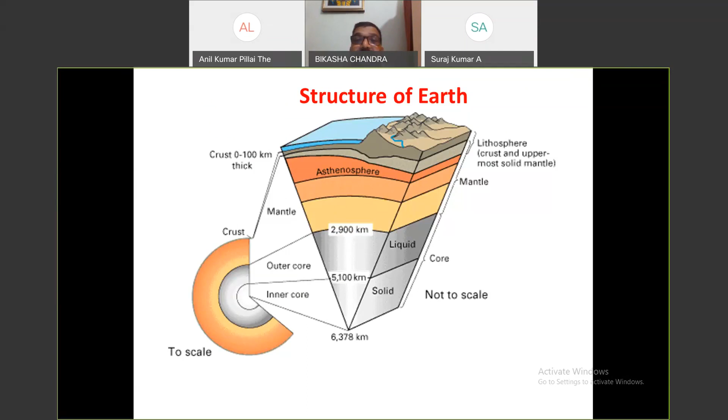We see how earthquakes really occur. We first need to learn about the constitution of the earth, which I already showed in my previous slide. Now we go into detail.

In the first 350 kilometers, we can also divide it into lithosphere, then asthenosphere, then mesosphere. From 0 to 100 kilometers it is called lithosphere, which, toward the bottom, is cool, rigid, and brittle in nature.

It is cool because it's the top surface of the earth, and it is rigid and brittle in nature. Then from 100 kilometers to 350 kilometers it is called asthenosphere, which is hot, weak, and plastic - not so solid, plastic but in hot condition.

Then below that we have the mesosphere. It is hot but stronger because it has more pressure, and due to the high pressure it is more strong.

And we can see here the oceanic crust. The continental crust is around 0 to 50 kilometers, and the oceanic crust is around 10 kilometers. Up to the lithosphere, it is 0 to 100 kilometers. So we can go to the next slide.

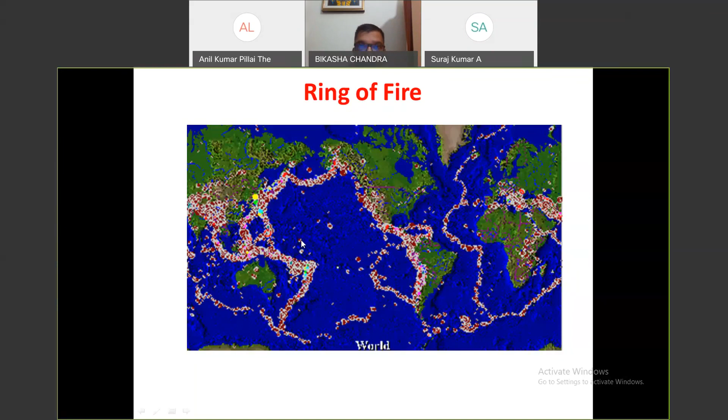From these, we got the idea that the top crust consists of plates, and these are the fault lines in between plates - the joints in between plates. From that, they got the plate boundaries. From the Ring of Fire, they derived the plate boundaries.

So we have different plates - all the boundaries are here. You can switch off your video if bandwidth is a problem. I'll do it from my end. If bandwidth is a problem, I think you can switch off your video, sir. Yeah, I did that from my end, sir.

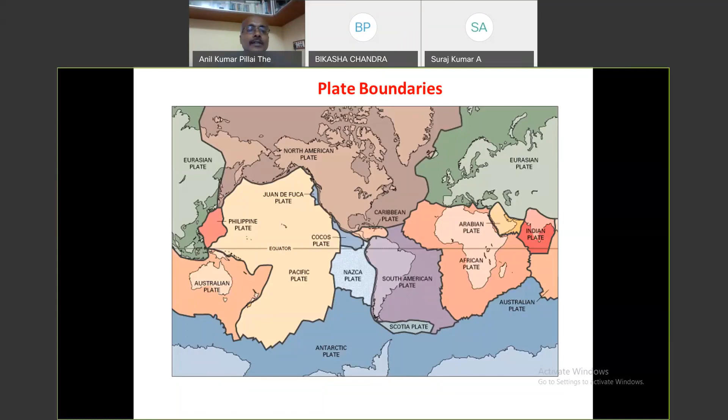Thank you. Okay, so now we can see the tectonic plates. Tectonic plates are large parts of the lithosphere, which we have already discussed. It is floating on the asthenosphere.

As discussed earlier, the asthenosphere is plastic and hot, and the lithosphere is solid and brittle. Because of the convection heat, and since it is plastic, it puts pressure on the lithosphere, which is rigid. The convective currents move with velocities of several centimeters per year.

The plates interact with one another in three basic ways: they collide with each other, they move away from each other, or they slide past one another.

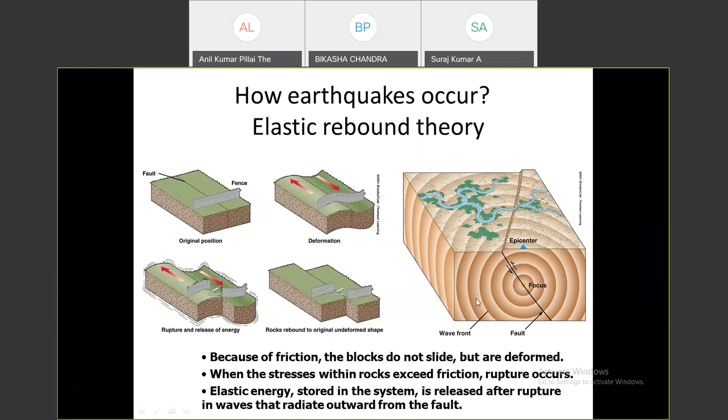Going to the next slide, we generally have body waves, elastic waves. The waves from the focus generate outwards, and these are called elastic waves. In elastic waves, we have body waves and surface waves. In body waves, we have two types.

Longitudinal waves are faster than transverse waves. The particles oscillate in the direction of spreading, like a sound wave, with compression and rarefaction. These are called primary waves.

The other type also starts from the focus towards the surface of the earth. These are called transversal waves. The particles oscillate in the direction perpendicular to the spreading direction, and these are called shear waves or secondary waves. They do not propagate through liquid.

As seen in the previous slide, the outer core of the earth is liquid, so S waves cannot pass through it. They resemble light waves, like sine waves, while P waves resemble sound waves.

Now in the diagram, this is the undisturbed material. When the P wave starts, we see compression, expansion, compression, expansion in the direction of movement. The secondary S waves move just like sine waves, up and down, in the direction of movement. So from the interior of the earth, or the focus, waves move towards the surface as body waves, with P waves moving like compression and rarefaction, similar to sound waves.

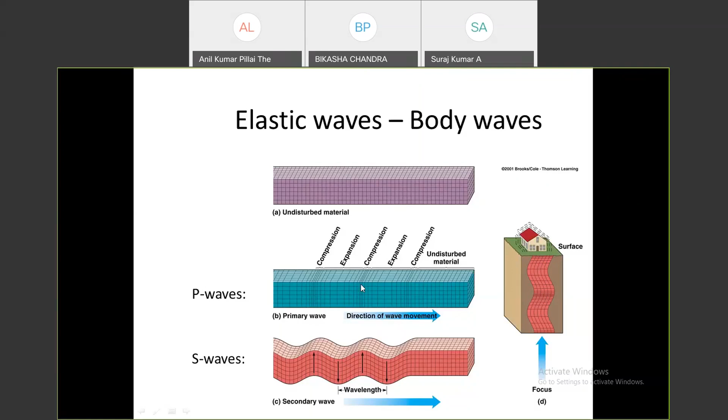Now, the surface wave. When body waves reach the surface of the earth, the primary and secondary waves convert to surface waves. Surface waves are harmful to our structures and buildings because buildings are situated on the surface and the ground.

We have two types of surface waves. One is the Rayleigh wave—you can see how it moves just like sine theta, up and down. And there is the Love wave.

The Love wave is also like a secondary wave, but it moves sideways—not up and down like a sine wave, but laterally like a snake. It moves horizontally, sliding side to side, while the Rayleigh wave also moves vertically. Both are sine waves, but the direction of movement is different.

You can see here the Rayleigh wave and the Love wave, and both are harmful to structures because they are surface waves, and their amplitude diminishes with depth. They have large amplitudes, are dispersive waves, with large periods, and are faster because they are surface waves.

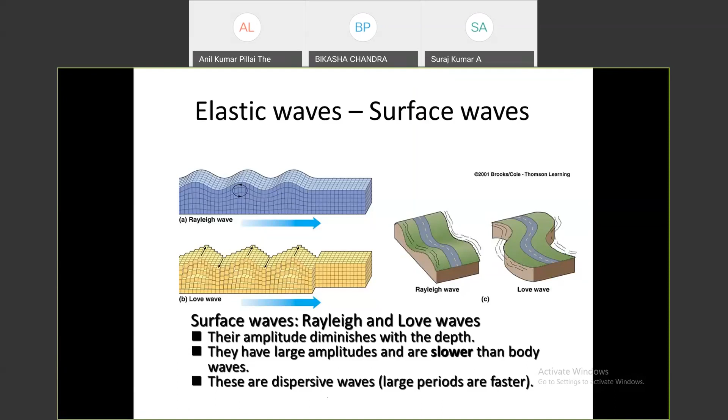So how does a seismogram actually work? We can see a simple diagram of a seismograph—a heavy pendulum, how the ground shakes, and how a sheet of paper moving on a drum plots the recording.

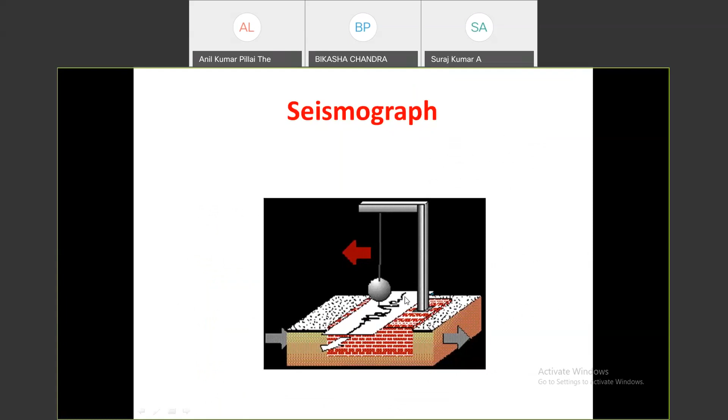In modern times, we have digital seismographs. The modern digital broadband seismographs are capable of recording almost the whole seismological spectrum, from 50 Hz to 300 seconds. Their resolution of 24 bits allows for precise recording of small quakes as well as unsaturated registration of the largest ones.

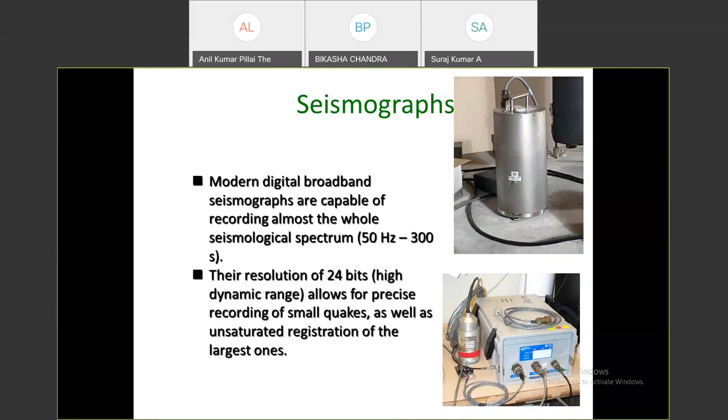Now we can discuss observational seismology, and how we can locate an earthquake. To locate the earthquake, we need precise readings of the time when the P and S waves arrive at a number of stations.

We can see here on the drum paper, the P wave has faster velocity, so it reaches first. Then the S wave reaches, so there is a time gap between the P wave and S wave—this is the first S wave, this is the first wave, this is the time gap. Since we know the velocity of the P wave and the velocity of the secondary wave, and this is the surface wave, from this time gap we can get the distance to the epicenter.

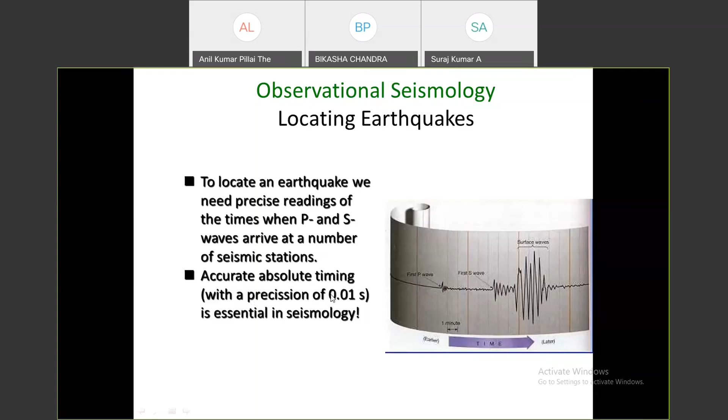Accurate absolute timing with a precision of 0.01 second is essential in seismology, so knowing the difference in arrival times of two waves is done using the travel time curves, which show how long it takes for P and S waves to reach some epicentral distance.

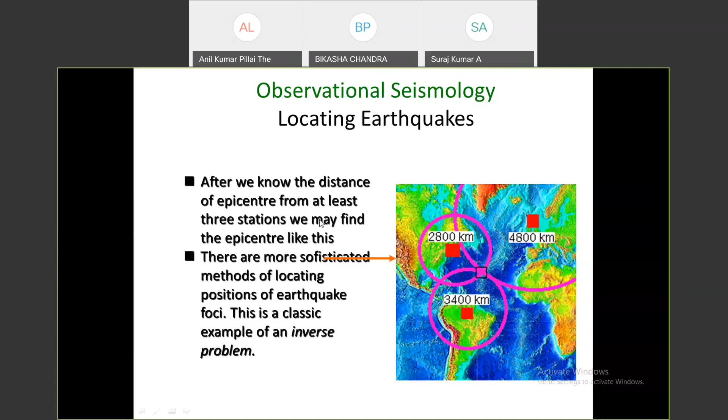We can locate the epicenter because a minimum of 3 observation centers are necessary. We know the distance to each observation center, and we can draw the radius of 3 circles. The meeting point of the circles is called the epicenter. So after we know the distance of the epicenter from at least 3 stations, we find the epicenter by drawing the circles.

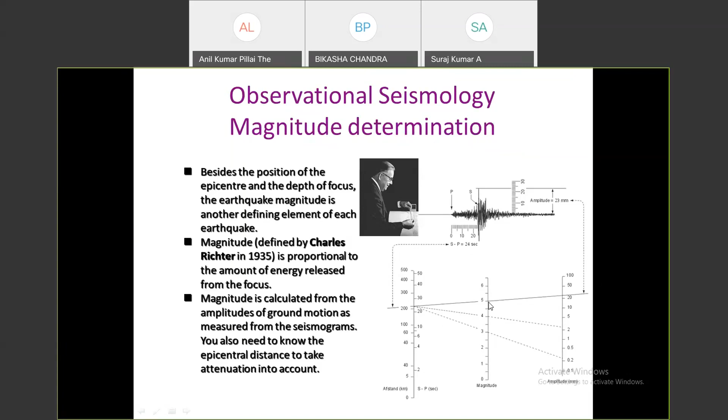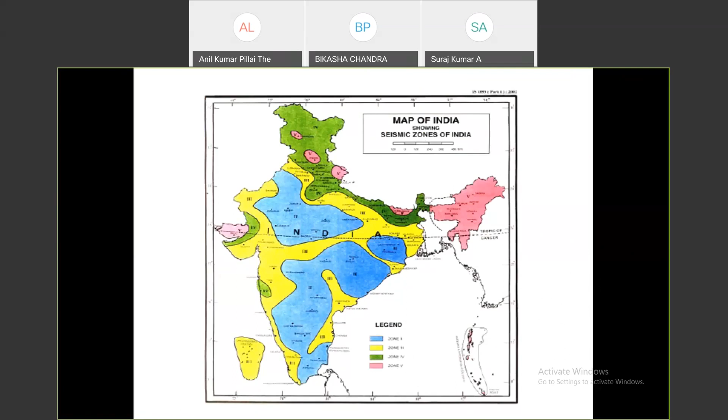Next, based upon the frequency and intensity of earthquakes, in India we have divided into 4 zones. In the previous code from 1993, it was 5 zones. Now zone 1 has merged, so now we have 4 zones divided according to importance.

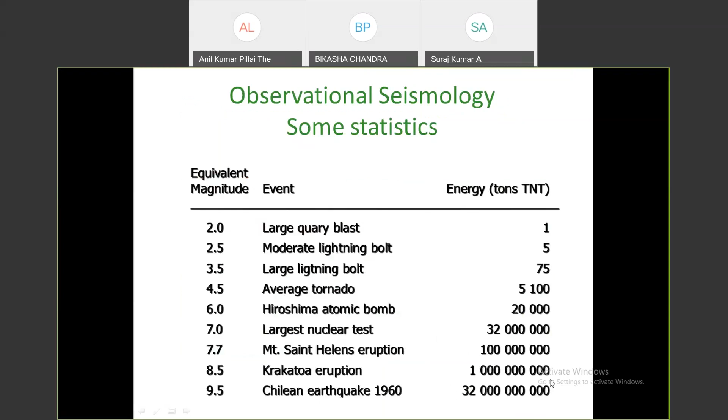Next, we can also express energy in TNT equivalent. For comparison: a quarry blast releases a certain amount of TNT, a large lightning bolt about 75 tons TNT, the Hiroshima atom bomb about 20,000 tons TNT equivalent, and the Chilean earthquake released this much TNT. So we can compare how much energy is released in an earthquake.

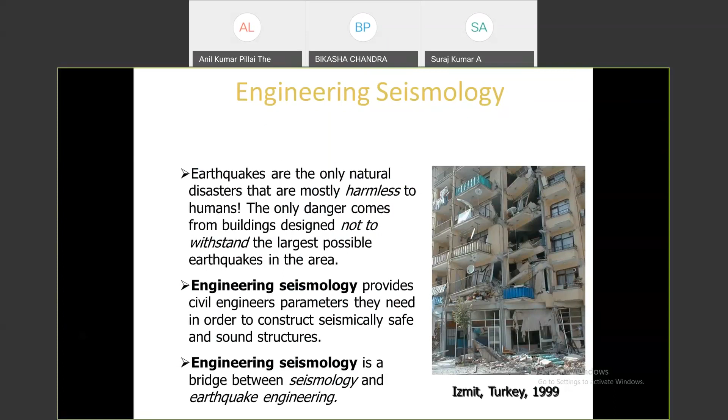Next, we can come to engineering seismology, where earthquakes are natural disasters that are mostly harmless to humans. The only danger comes from buildings designed not to withstand the largest possible earthquake. Engineering seismology provides civil engineers the parameters they need to construct seismically safe and sound structures. Engineering seismology is a bridge between seismology and earthquake engineering.

So a civil engineer requires these parameters: maximum expected horizontal ground acceleration PGA, maximum expected horizontal ground velocity PGV, maximum expected horizontal ground displacement PGD, response spectra, and maximum expected intensity. Engineering seismologists mostly use records of ground acceleration obtained by strong motion accelerographs.

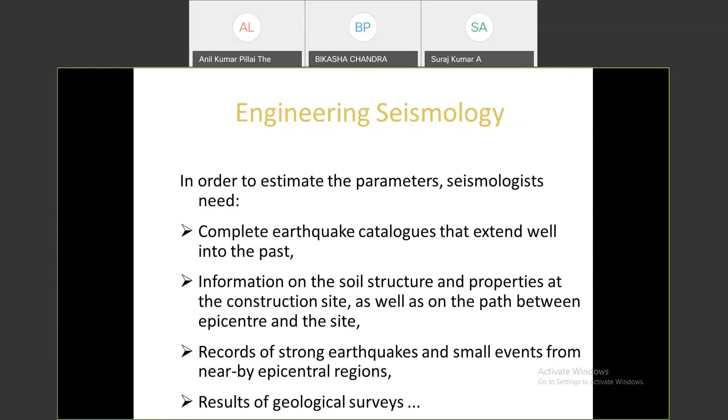In order to estimate parameters, seismologists need a complete earthquake catalog extending into the past, information on soil structure properties at the construction site as well as on the path between epicenter and site, records of strong earthquakes and small events near the epicenter, and results of geological surveys. So engineering seismology requires a complete and homogeneous earthquake catalog of the nearby area, epicentral distance, and soil conditions should be mapped. This is an example in Croatia.

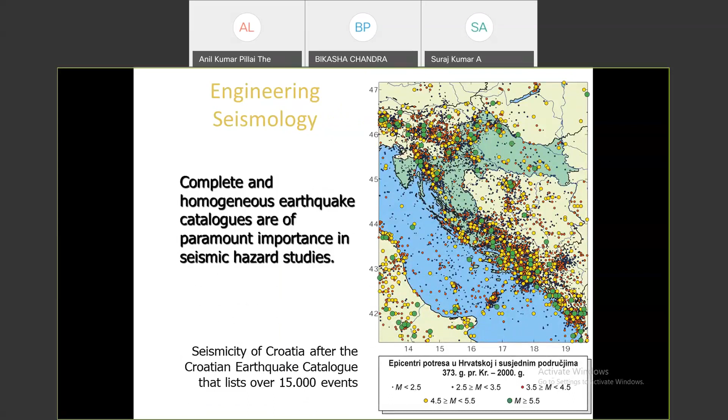We generally estimate in two approaches: one is probabilistic and the other is deterministic. In the probabilistic approach, we use statistical methods to find the probability of exceeding a predefined level of ground motion. In the deterministic approach, we use a predefined earthquake and calculate the effect and parameters of seismic force on the construction site.

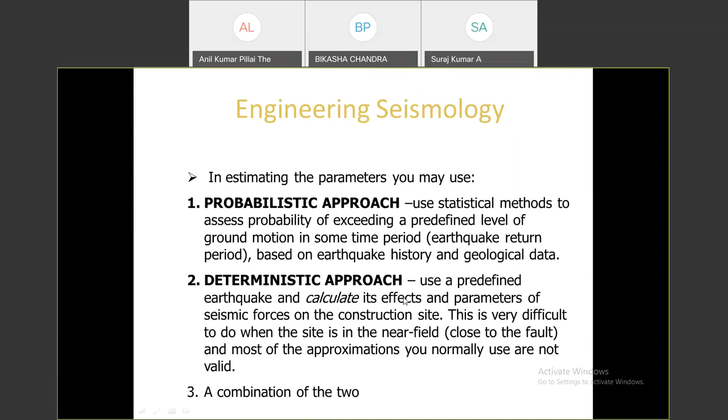Amplification depends upon the construction site and the soil condition below, such as in a coastal area versus a central area, which is always different. So the amplification of seismic waves may be the same, but it will amplify against the soil condition.

Amplification of seismic waves in shallow soil deposits may cause extensive damage even far from the epicenter. It depends on the thickness of soil above the bedrock, density and elastic properties of soil, frequency of shaking, and strength of earthquake. So even if the magnitude of an earthquake is the same at a place, the damage depends upon the soil condition above the bedrock.

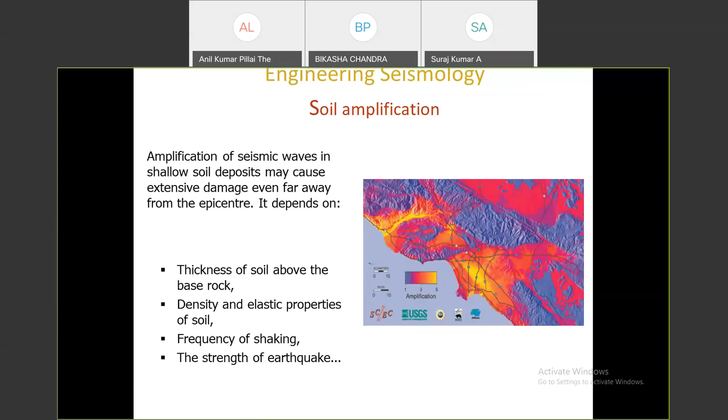So why should we build a sustainable structure? Because here the magnitude is 7.9, and for example, the death toll was this much in Japan. Though the frequency of earthquakes is very high, there were only very few deaths after 1923 in Japan, because all structures were built sustainably after that disaster.

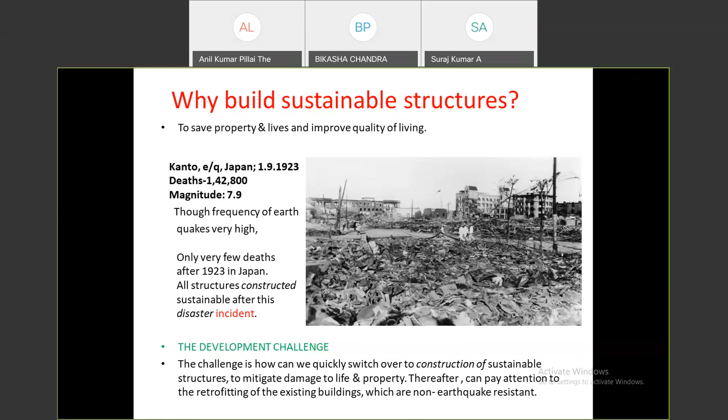So the challenge is how can we quickly switch over to construction of sustainable structures to mitigate damage to life and property. Thereafter, we should retrofit existing buildings which are non-earthquake resistant.

In India, we became more sensitized after the 2001 Bhuj earthquake. Before that, we were always giving attention to relief works. But after 2001 Bhuj, we gave more attention to mitigation, management, and damage control - all these things relating to earthquake resistant design and its importance.

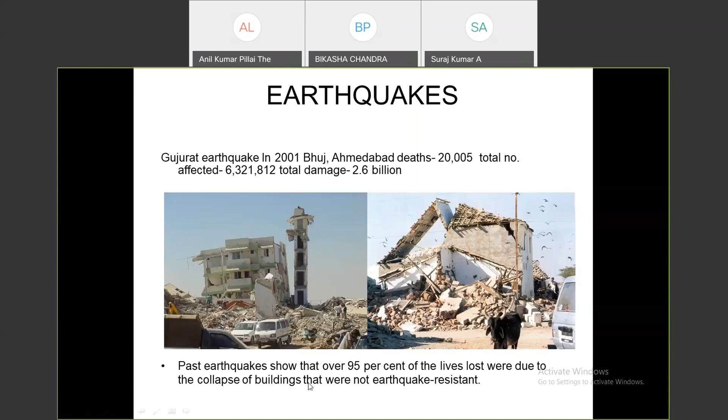Past earthquakes show that 95% of lives were lost due to collapse of buildings that were not earthquake resistant. Earthquake damage may be to human settlements, buildings, structures, and infrastructure - bridges, elevated roads, railways, water towers, pipelines, electrical generating facilities - and will continue if structural safety is not ensured.

Aftershocks of an earthquake can cause much stronger damage to already weakened structures. Earthquakes also trigger other hazards like landslide, fire, and flood.

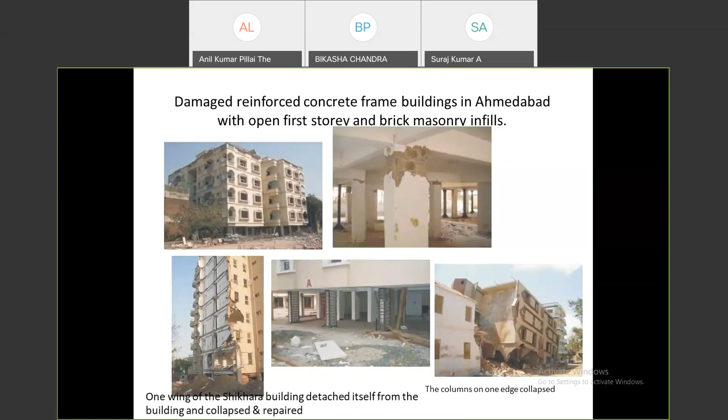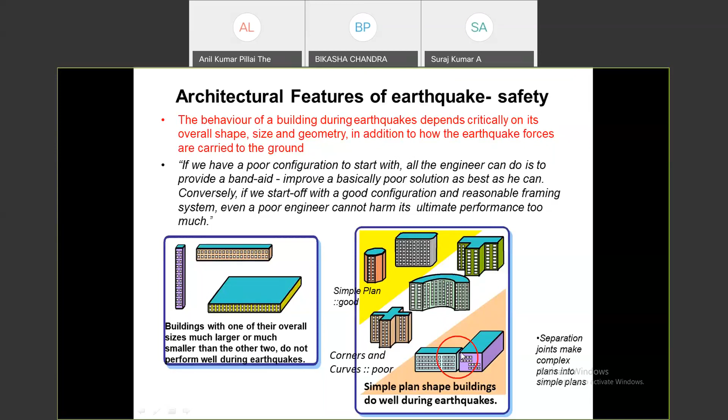These are simple plans, and we can use regular plans. In this last diagram, it was an L-shaped plan, and we just separated the joints to convert this complex L plan into two simple plans, because such a connection will attract torsion during vibration.

The sources of damage, as we've already seen, may be direct or indirect. The direct effect is one: ground failure, which may be vibration of soil, liquefaction, or ground lurching - first, damage due to surface faulting. This damage can completely demolish a house through rupture, tilting, and sometimes minor damage.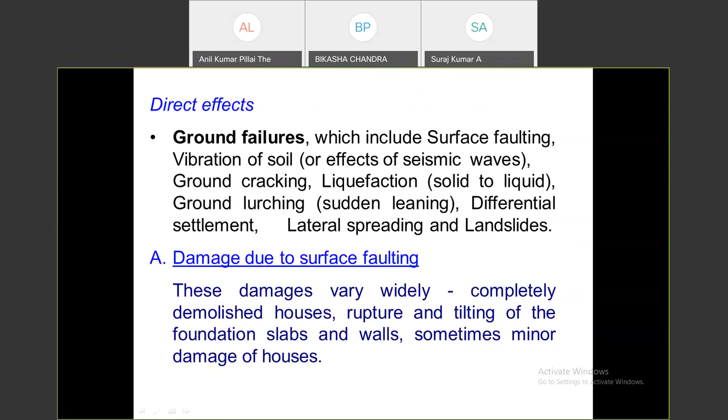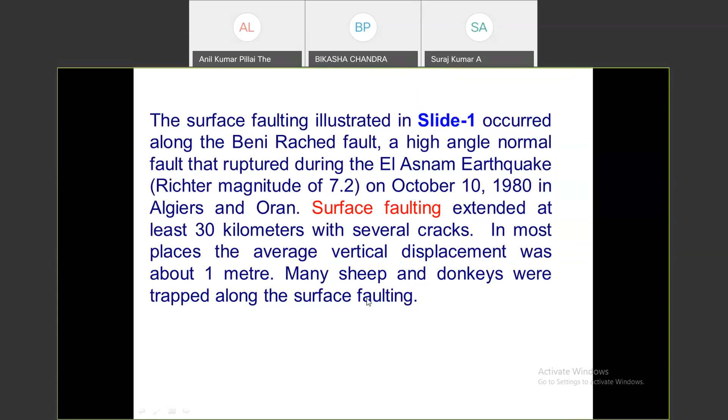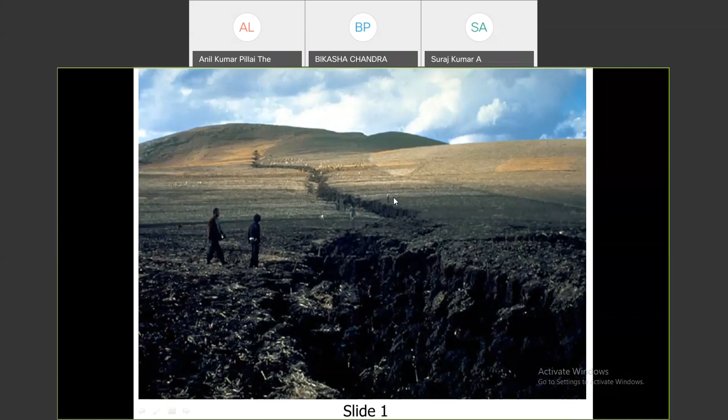We can see in this slide how a 7.2 magnitude earthquake on 10th October in Algiers caused surface faulting extending with more than 1 meter vertical displacement. Many sheep and donkeys were trapped along the surface faulting. This is actually after the earthquake - you see how the surface faults and the horizontal as well as vertical separation of the fault.

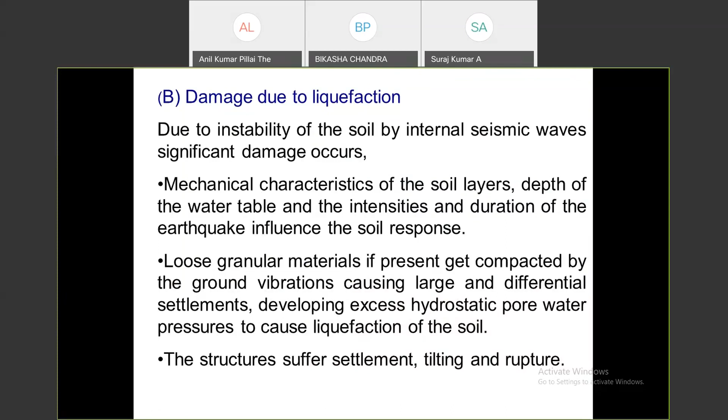Next, due to liquefaction - instability of soil can cause significant damage. Mechanical characteristics of soil layers, water table intensities, and duration of earthquake influence the soil response. Where granular materials are present, they get compacted by ground vibration, causing large and differential settlement, developing excess hydrostatic pore water pressure and leading to liquefaction of the soil. The structure suffers settlement, tilting, and rupture.

So we can see the effects of liquefaction in the next slide.

I think there is a problem, is it, sir?

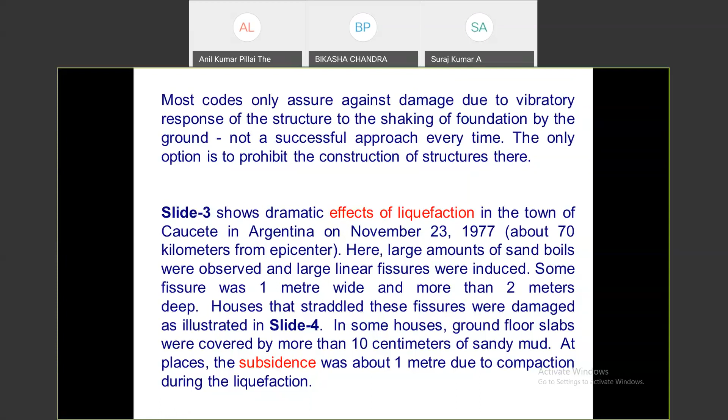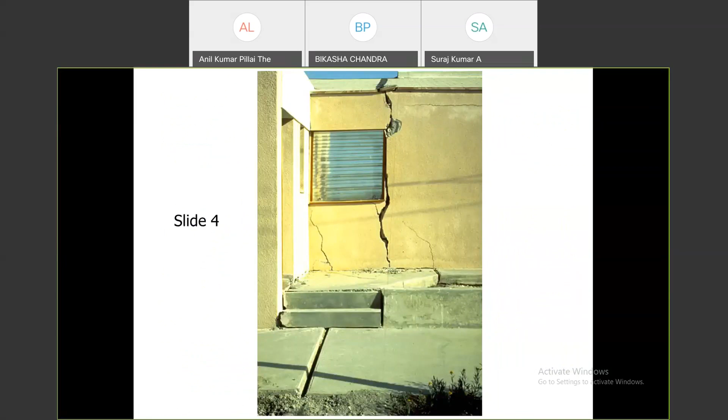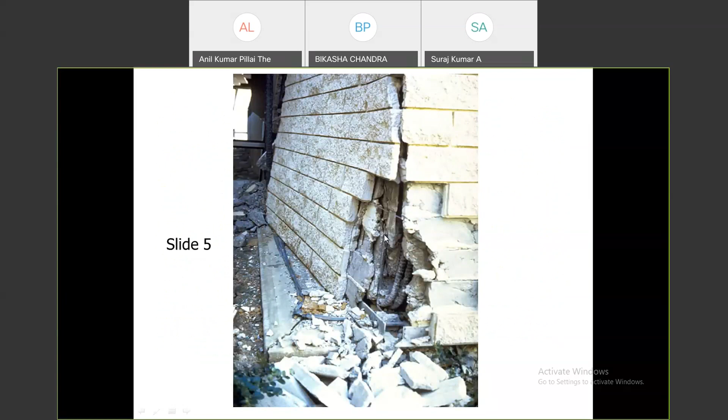Field inspection revealed that seismic performance of a structure is very sensitive to the type of foundation, structural material, design, and construction detailing. Slide 5 shows structural sliding, how, because of spreading of the soil and loose granular soil below, the wall and foundation are separated and spread apart.

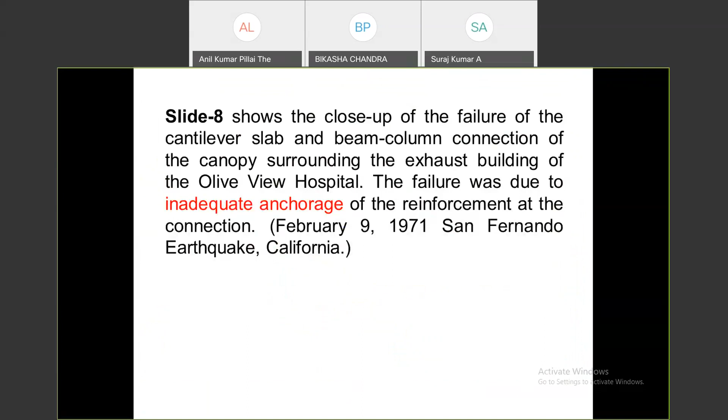So generally we will avoid cantilevers, we will avoid balconies, or they should be detailed according to code. We will discuss this in a few other slides.

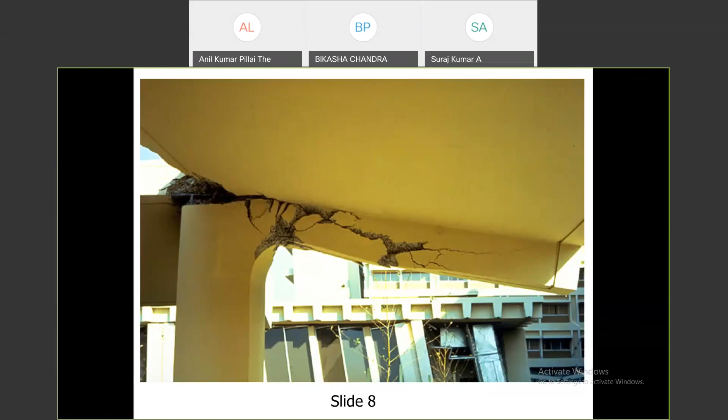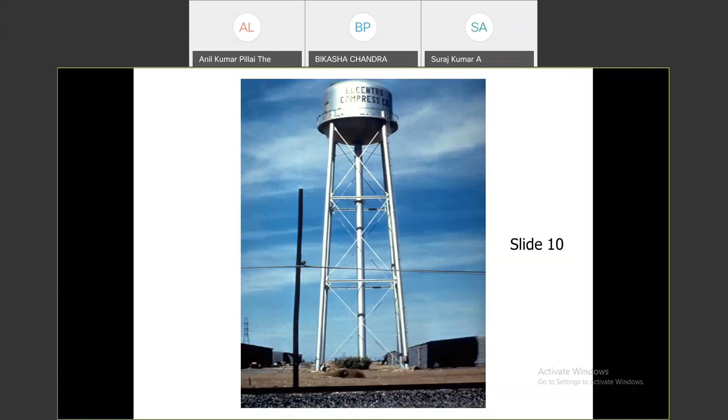Next, because of high slenderness ratio, you can see how the steel water tank column size looks slender, and with thin bracings, how it fell down. You can also have indirect effects like tsunami, landslide, floods, and fires.

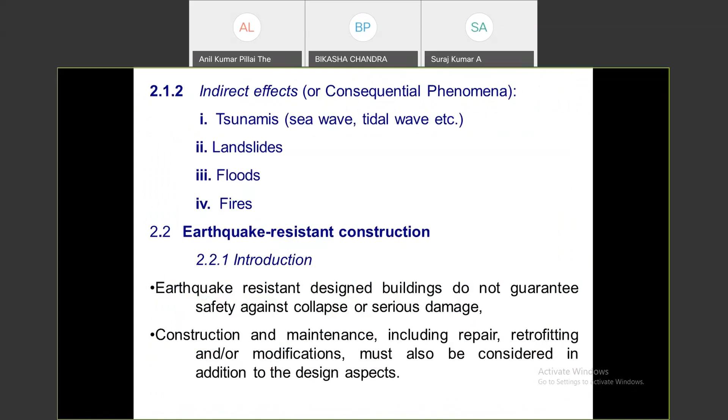Earthquake resistant construction and resistant design buildings do not guarantee safety against collapse or serious damage. Construction and maintenance, including repair, retrofitting, and modification, must also be considered in addition to design aspects.

Tied to different elements of the substructure, when the structure is built on a site with poor, loose, saturated, granular soil, moderate or strong shaking may cause horizontal displacement due to lateral spreading. In slide 12, we can see the damage was due to lateral ground spreading, loose saturated granular soil, and inadequate reinforcement of foundation tie beams.

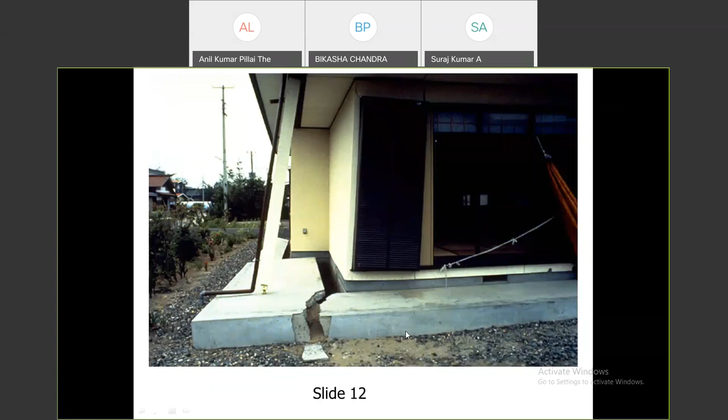Here you can see how it has been detached because of this granular soil. And this is a column - at the bottom of the column, since in a storied building the load flows from top to bottom.

So the bottom portion of the column takes the heavy load, and because of rocking up and down, if inadequate lateral ties are provided, not according to proper detailing, the reinforcement rods inside buckle because of the pushes, and it comes out by bursting.

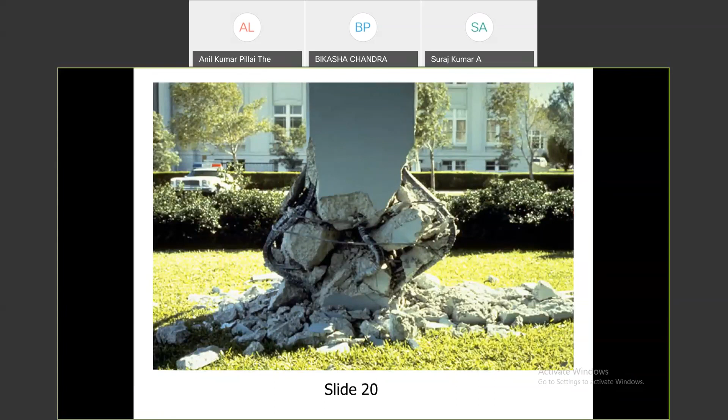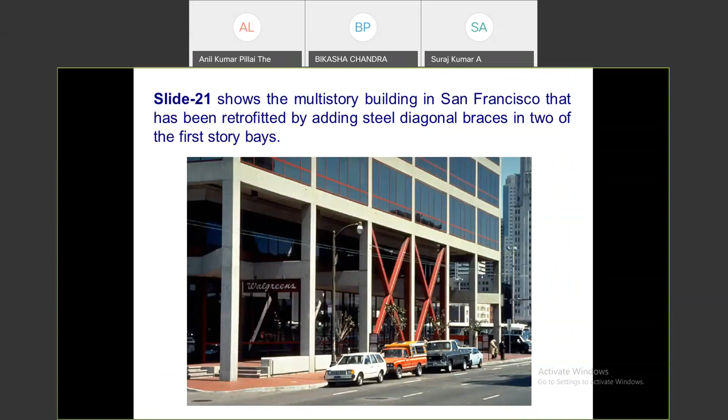So now we are coming slowly to the codes. We will discuss a list of standards of earthquake engineering - Indian codes that we have. We have the standard IS 1893 Part 1, which was revised in 2016 after the Bhuj earthquake from the previous version. This is the standard criteria for earthquake resistant design of structures, and it has 5 parts.

Part 1 presents the provisions that are general in nature and applicable to all structures. Part 2, revised in 2014, is related to liquid retaining tanks and water tanks. Part 3, revised in 2014, is dedicated to bridges and retaining walls. Part 4, revised in 2015, is for industrial structures specially. So part 1 is general, but parts 2 and 3 are specific.

Part 5 is for dams and embankments, and it has not been revised. Actually, it is not 2014, I just typed it that way - it is not revised yet, part 5, dams and embankments.

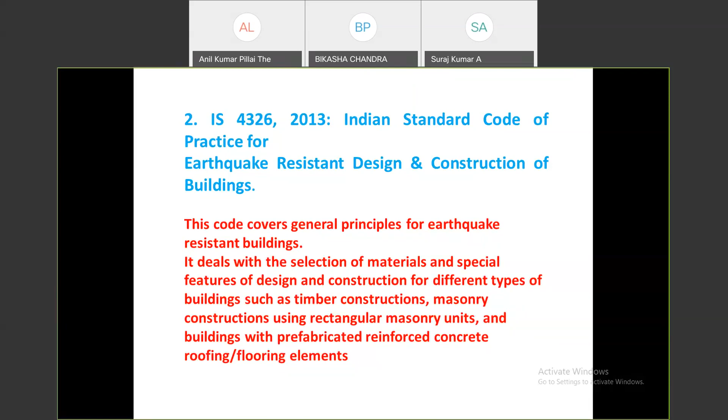Then there's another code, IS 4326. It is only one code, no parts - it is for earthquake resistant design and construction of general buildings. This code covers the general principles for earthquake resistant buildings. It deals with how to select materials, and special features of design and construction for different types of buildings such as timber construction, masonry construction using rectangular masonry units, and buildings with prefabricated reinforced concrete roofing/flooring elements.

The third is IS 13827 1993, for improving earthquake resistance of earthen buildings. India has more rural areas with earthen buildings still existing up to now, so how we can improve their earthquake resistance can be found in this code.

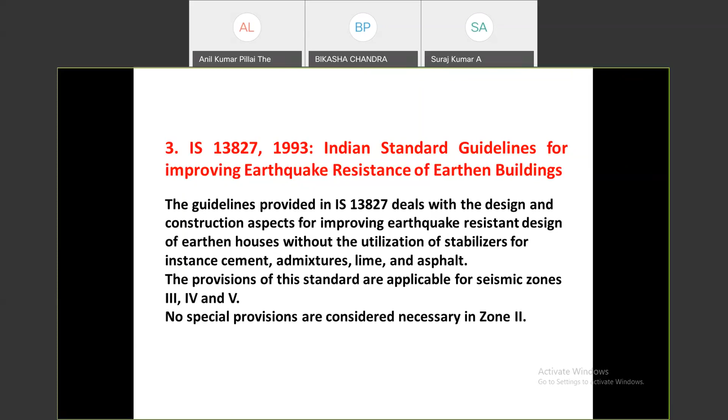The guidelines provided in this code deal with the design and construction aspects of improving earthquake resistance of earthen houses without the utilization of stabilizers, for instance cement, admixture, lime, and asphalt. The provisions of the standard are applicable for seismic zones 3, 4, and 5. No special provisions are considered for zone 2.

Similarly, the next code is 13828, which is generally applicable for improving the earthquake resistance of low strength masonry buildings. It provides the general principles of design and specifications for construction features for improving earthquake resistance of buildings of low strength masonry. The masonry includes burnt clay brick and stone masonry in weak mortars like clay-mud. The provisions of these standards are applicable in all seismic zones, though no special provisions are considered necessary for seismic zone 2. Low strength masonry dealt with in this standard is termed non-engineered and is not totally free from collapse under seismic shaking of modified Mercalli intensity 8.

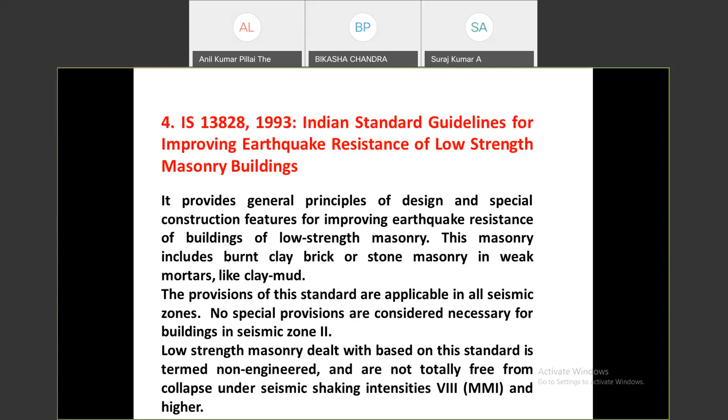Similarly, the next code is 13920. This is also a most important code, like IS 1893, for ductile detailing, revised in 2016. This standard provides the requirements for designing and detailing reinforced concrete structures in order to equip them with adequate toughness and ductility to withstand severe earthquake shocks without collapse. Previously, reinforcement detailing was as per IS 456, but after the Bhuj earthquake we became serious, and now we detail all buildings as per IS 13920 after 2001, and this detailing is different from 456.

The provisions for reinforced concrete construction given in this standard apply especially to monolithic reinforced concrete construction. Precast or pre-stressed concrete members may be used only if they can provide the same level of ductility as monolithic reinforced construction during or after an earthquake. The last important code is IS 13935:2009. This guideline generally covers the principles of seismic strengthening, selection of material, retrofitting techniques, and repair.

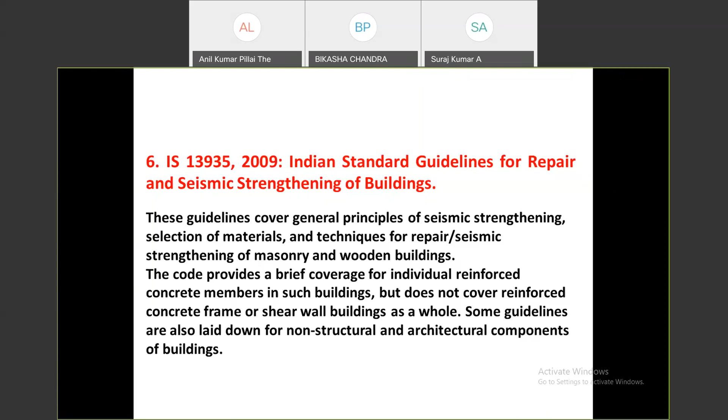So just briefly we'll go through this. These are the 5 zones. A town falling on the boundary of two zones shall be considered the higher zone. Now we have only 4 zones, since zone 1 and zone 2 merged in the latest code.

Sir, in this earlier map, can you explain about the zones, like which states, for example this yellow is what? Sir, the blue is actually zone 2 — zone 1 and zone 2 have merged in the latest code, so that is zone 2. Which is the most severe zone actually? Zone 5, sir, is severe. Zone 5 is only very less, no? Zone 5 has higher magnitude, you can see in the Himalayan Eastern area, and the boundary between the Indian plate and the Eurasian plate, that is the Himalayan area.

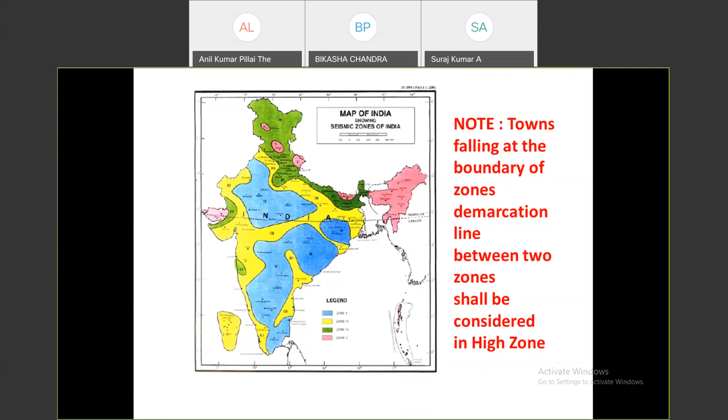Next, what is the basic approach of seismic design philosophy? One is to ensure that structures possess at least the minimum strength to withstand a minor earthquake without any damage. One should design the building such that, because one cannot design for earthquake proof — an earthquake may not occur in 100 years, or sometimes it may occur — so we have a philosophy: for minor earthquakes, the building can withstand without damage.

Two, it can resist moderate earthquakes without significant structural damage. So some non-structural damage may occur, like doors, windows, fans, something may fall, but without significant structural damage to beams and columns.

If there is damage, it can be repairable. In its second philosophy, it can be repairable because it is in a moderate earthquake. And the third is the most important.

Structure can withstand a major earthquake, like magnitude 8, 9, 9.5 higher, major earthquake design, but without collapse. So beam may damage, the column may damage, slab may damage, but it will give some time so the occupants can run away, without any collapse. Building may bend also, but no collapse. The occupants can escape. So this is actually the design philosophy, so that we can gain the strength as well as economics.

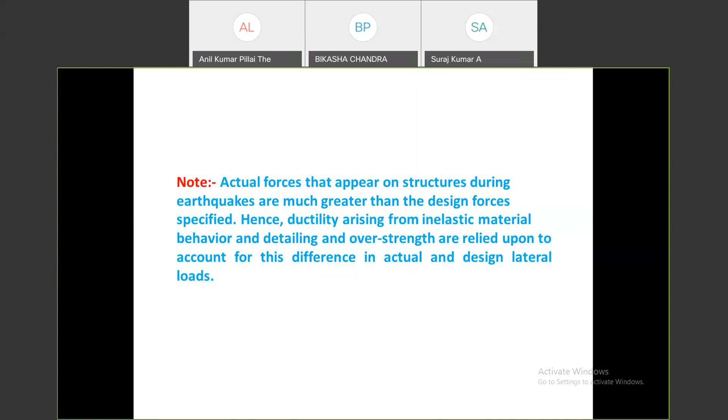So we are actually depending on that ductility. So the important thing is ductility coming over that. So what is the design spectrum? It is in 6.4 of the same code section.

For that we should have the earthquake load. Actually the ground is shaking horizontally. So what is the total horizontal earthquake force on a building? If we know the weight of the building, we can multiply it with a horizontal seismic coefficient, given in the code, and that coefficient is AH, which depends upon Z, that is the zone. The place is in which zone, as we have seen in the previous map, zone 2, 3, 4, or 5, and also I, that is called the importance factor.

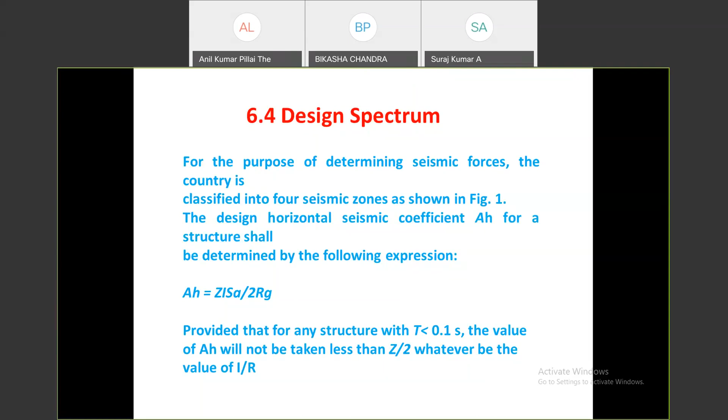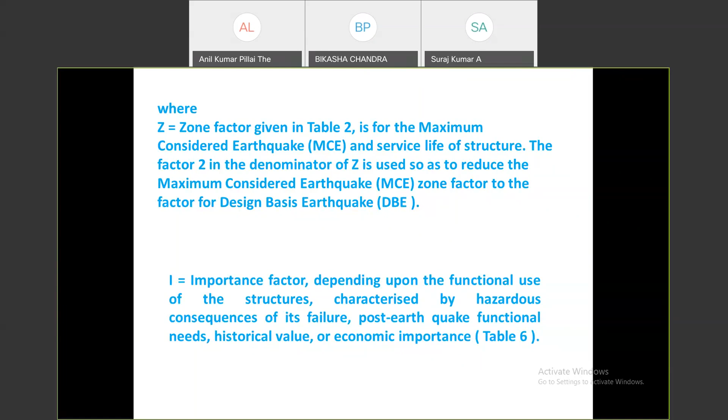Where Z is the zone factor given in table 2, for the maximum considered earthquake and service life of structure. And I is the importance factor, depending upon the functional use of the structure, like telephone building, hospital, police station, industry, firefighting, which should be ready during the earthquake. We should give more importance to a school or institute than a residential building. So this is called the importance factor, given in table 6 that we will show.

Then there's the response and reduction factor. Depending on the structure, the seismic damage performance of a structure, like a masonry building, will be more prone to damage compared to an RCC building, and compared to a special detailing building. So response reduction factor, what is the response we can reduce also, a scope is given in the code, that is given in table 7.

And SA by G, this is the average response acceleration coefficient for rock or soil sites. As in the previous slide, we have seen the magnitude of earthquake may be same, but the ground acceleration will be amplified because of the bedrock or soil properties. So SA by G, the average response acceleration coefficient for rock or soil sites, as given in figure 2, is based on appropriate natural periods and damping of the structures. These curves represent the free field ground motion.

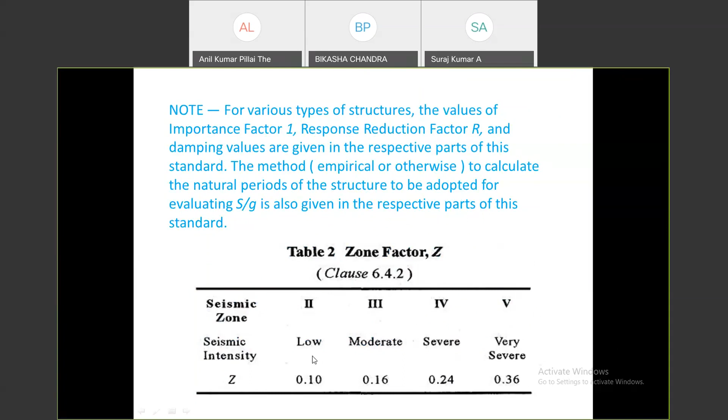So now you see table 2, zone. We have 4 zones. Zone 1 and 2 are already merged in the recent code. So seismic intensity in these zones, the zone factor we can take from that code to calculate the coefficient AH. Here we can take the zone factor depending upon which zone the structure is in. Zone 2, 3, 4, very severe 0.36, low 0.1, like that, given in the code table 2. And this is actually for rock, medium, and soft soil.

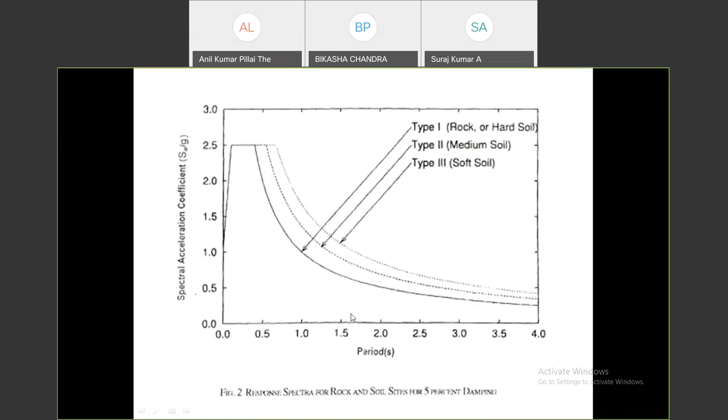This is the time period table, and this is SA by G, as we have discussed earlier in the previous slide. So according to the soil, different rock, medium soil, very soft soil like coastal area, these are the coefficients, and this is the time period of the structure.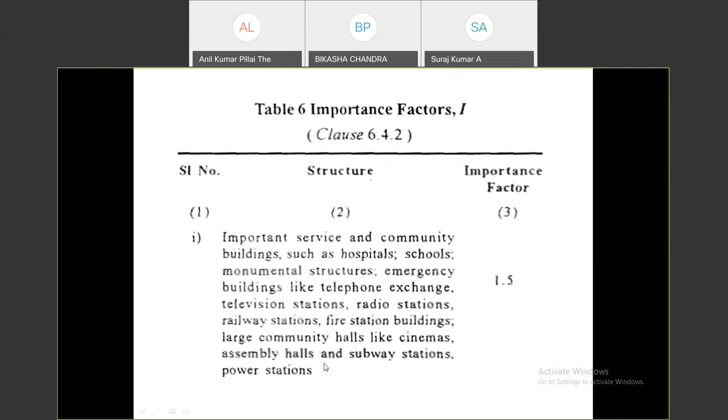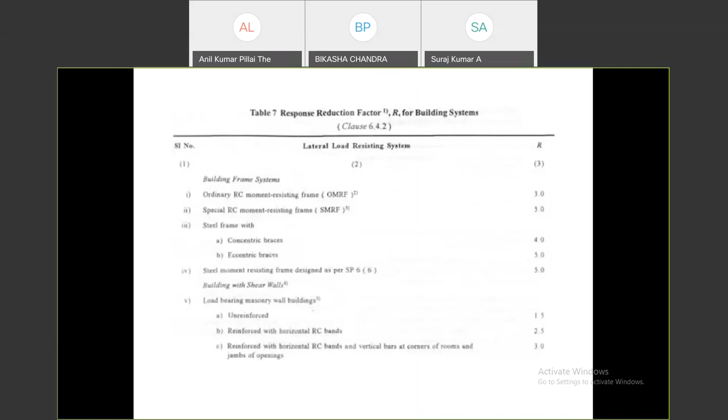This is response reduction factor R. Number 1 is ordinary RC moment resisting frame, OMRF, and special RC moment resisting frame. The value is different for ordinary RC moment resisting and for special moment resisting, because ordinary RC moment resisting frames means already designed by IS 456 for existing buildings, but special RC moment resisting frame means where 13920 ductile detailing has been taken into account with the earthquake code, so it has more resistance. The reduction factor will be as given in the code for different structures.

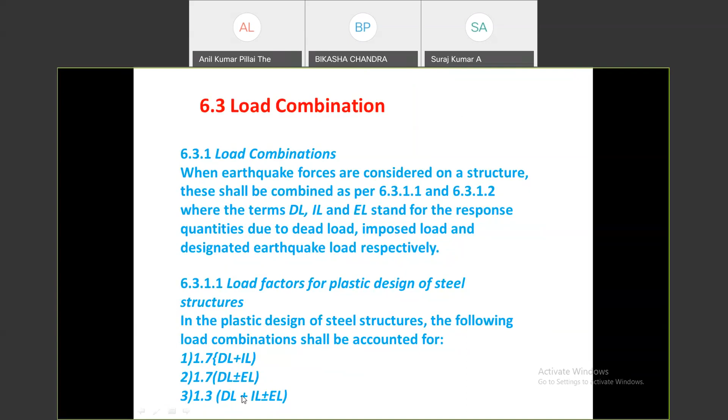Now directly I'm going to load combinations. We have dead load, imposed load, and earthquake load. For plastic design of a structure, we can take 1.7 dead load plus imposed load, 1.7 dead load plus earthquake load, and 1.3 dead load plus imposed load plus earthquake load for plastic design. For RCC, it is given as 1.5 dead load plus imposed load, 1.2 dead load plus imposed load plus earthquake load, and 1.5 dead load plus earthquake load. These are the combinations we can take, as the structure is subjected to, given in the code.

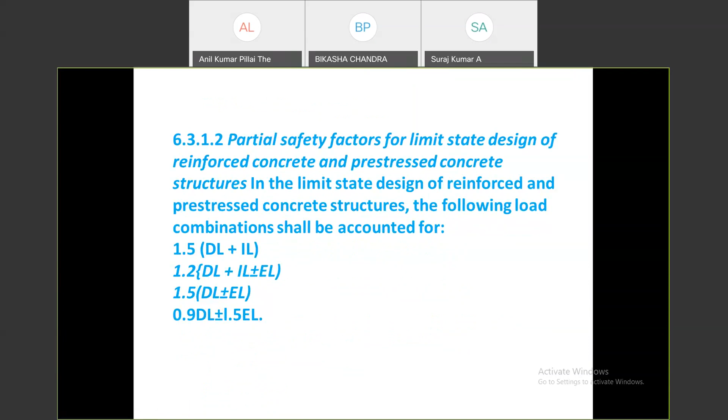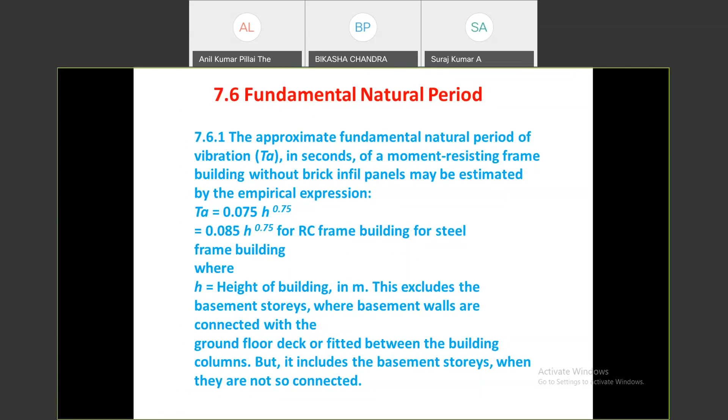Fundamental natural period: to calculate that, as shown previously, we can calculate the natural period of a structure given in the code as 0.075 h to the power 0.75, or 0.085 h to the power 0.75, for RC building or steel frame building, where h is the height of building. We can also approximately calculate the natural period of other buildings by the formula 0.09 divided by root over D, where D is the base dimension of the building at plinth level.

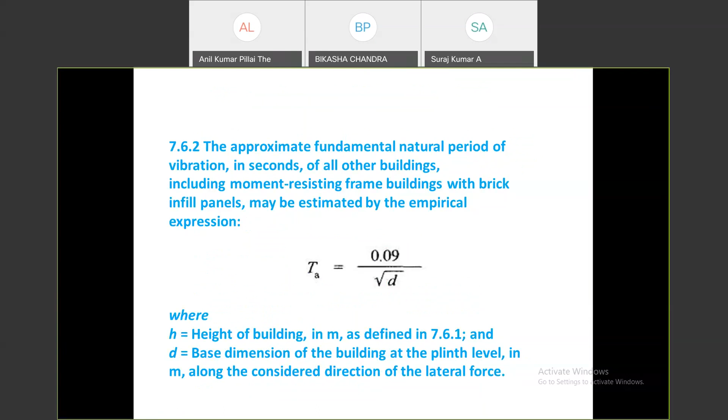The previous discussion was about static analysis, based on coefficient, that is an empirical method, but not dynamic analysis. Dynamic analysis is actually a real analysis, not an empirical formula. So we can do it.

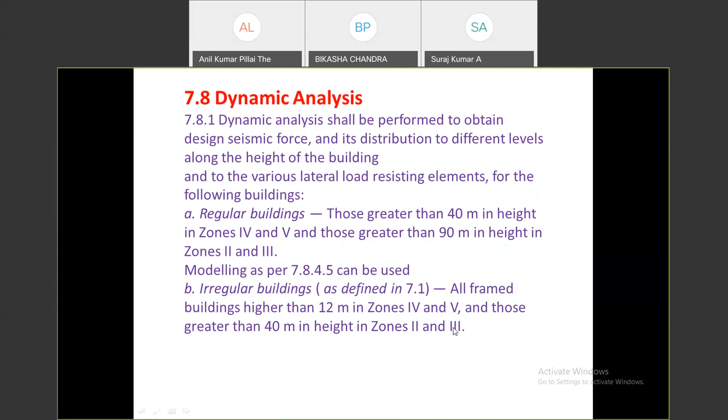Nowadays we are doing dynamic analysis, but for regular buildings, it applies for heights greater than 40 meters for zone IV and V, and greater than 90 meters for zone II and III, having less magnitude of earthquake. But for an irregular building, which will attract torsion in addition to bending and shear, irregular buildings are already defined in 7.1. All framed buildings higher than 12 meters instead of 40 meters in zone IV and V, and those greater than 40 meters, not 90 meters, in zone II and III, that is for irregular buildings, we have to perform dynamic analysis.

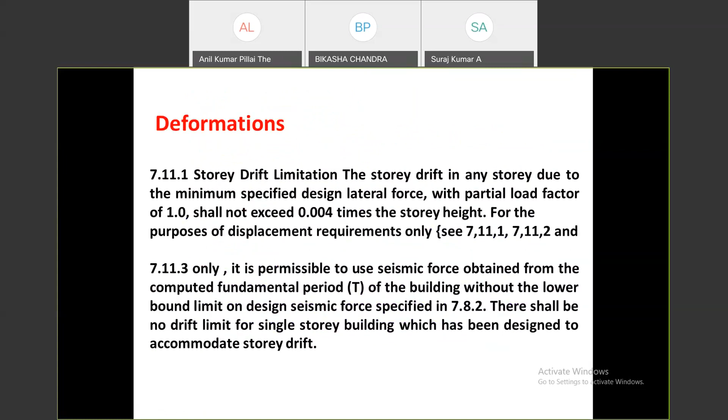We also have some limitation of deformation, that is story drift. It is given in the code as 0.004 times the story height, and it depends on the height of the building. Next is we can have story drift also.

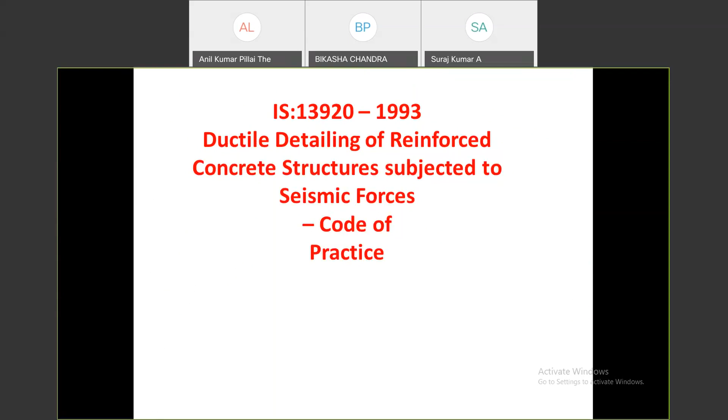Next, the next important code out of the 6 codes, 13920, mainly on detailing, and we can go through it quickly. Here, the longitudinal reinforcement: the top as well as bottom reinforcement shall consist of at least 2 bars throughout the member. From the design software, it may give some small reinforcement, but we have to take minimum 2 bars at the top face and bottom face, because sometimes there may be reversal when the building moves up and down, so bending may occur at the top or bottom. So positive steel at a joint face must be at least equal to half the negative steel.

The steel provided at the top and bottom face of a member at any section along its length shall be at least equal to one-fourth of the maximum negative moment steel provided at the face of either junction of a beam passing from one column to another. I have taken this diagram from the code.

You see the development length here. This is a beam joining to a column at the end, not passing over the column. The beam is ending here, so we have to provide the external joint.

Both the top and bottom bars of the beam shall be provided with anchorage length. You see the anchorage length is provided for both bars, not only the top bars. In IS 456, it is provided only for top bars, not bottom bars. So beyond the inner face of the column, it should equal development length plus 10 bar diameters minus the allowance for 90 degree bends.

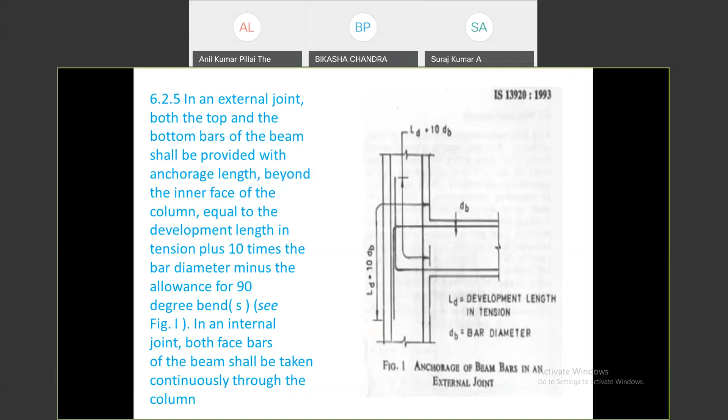Next you can see how IS 13920 treats this seriously. This is a beam at the junction of the column face, 2D, two times the effective depth.

The hoop spacing, the stirrups, we provide with close spacing, that is D by 4, where D is the effective depth of beam, or 8 times bar diameter. But in the central span of the beam, away from the junction, after 2D, the hoop spacing may be greater, this is D by 2. So we keep D by 4 near the junction and D by 2 in the central span.

This was not followed in IS 456, so this we will follow now.

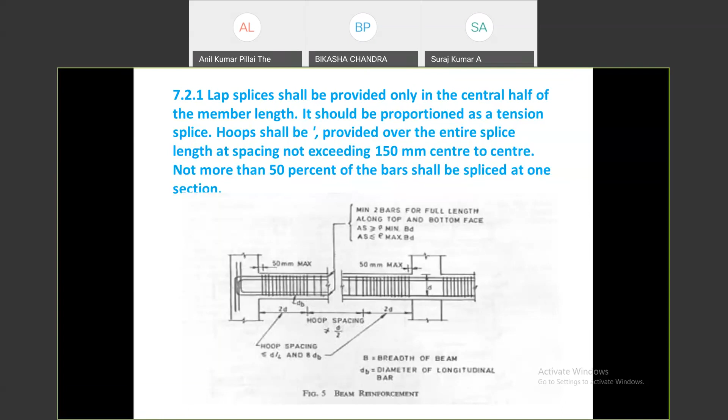We can see how serious we are in giving lateral ties in columns and stirrups in beams, how actually 135-degree stirrup ties are provided. Previously we were providing 90-degree ties, lateral ties in a column or stirrups in a beam.

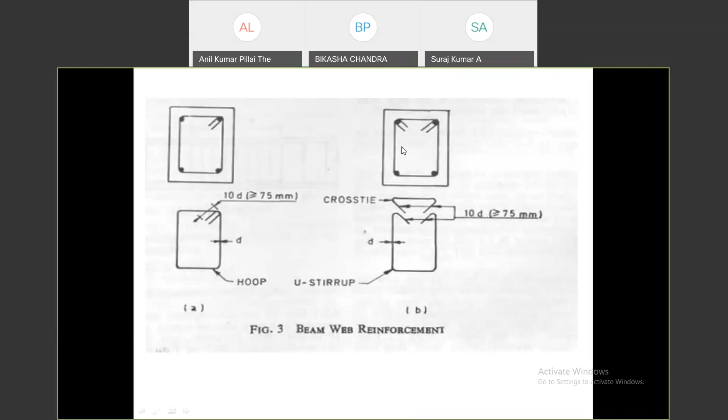Similarly, we can go to the foundation. In the foundation also, this is 100 mm. For this 100 mm, we have to provide special confining reinforcement.

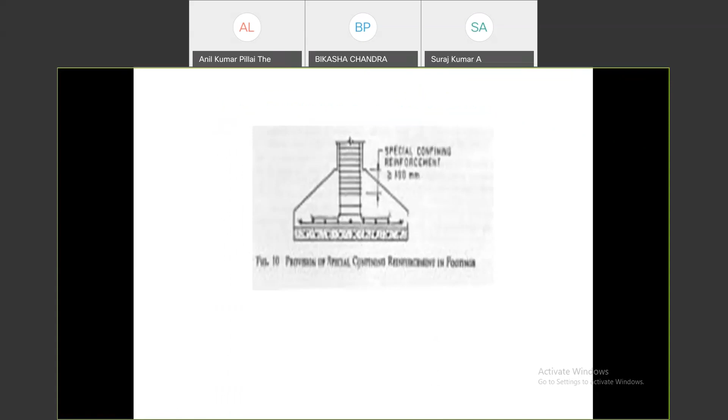So today we have discussed all this speedily, briefly, and finally I can say a properly designed, detailed, and constructed reinforced concrete structure can withstand severe earthquakes because of its ductile behavior.